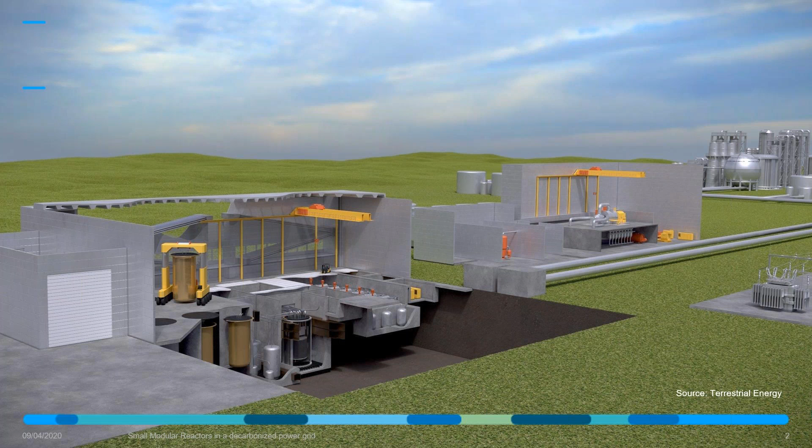So today and over the next 30 minutes, I will talk about small modular reactors, and I will try to answer one essential question, which is, can SMRs enable an affordable zero carbon transition for the European power grid? But before we dive into the economic study we performed, I want to share something that I truly got to believe over those last 2 years while I was working on the topic of SMR. And that is that I'm more and more convinced that small modular reactors may very well be the next big thing for the nuclear industry and even for the energy market as a whole.

Okay. You may wonder why I formulate such a strong statement. I would say that the reason why Tractebel does believe in SMRs and why we think small modular reactors are different is because it is a business model that starts from the right questions. And they do bring pretty sensible answers to those questions. So usually when I'm talking about this topic, I try to summarize those questions into 4 main questions.

The first one would be, in the post-Fukushima context, how do we recreate trust in nuclear safety? This is not an easy question to answer. For sure, there is a large variety of SMRs that include different technology, very different technology. But I would say the common thread within the SMR business model is the following. They aim at making safety simpler, which means simpler to explain and simpler to understand.

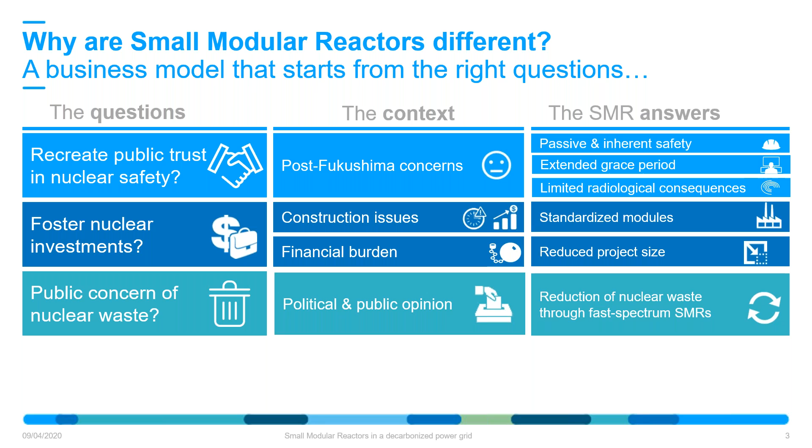I mean, anyone that has been working in nuclear energy right now probably has had a discussion with their families or friends about what is the impact of nuclear waste. Of course, there are technical solutions, valid technical solutions that have been put forward, but having the ability to reduce the radiotoxicity and to reduce the volume of nuclear waste, especially spent nuclear fuel, is definitely an advantage.

And then I would say the fourth question, and the one we will spend more time trying to understand today, is how SMR can play a role in the zero carbon transition. I will already give you very quick elements of what that entails. First of all, we know the context of intermittent renewables having a growing share of the production mix. That has its challenges. We know also the context of climate change that asks for a rapid decarbonization. SMRs try to tackle both those elements.

I would say for the first one, we know that nuclear energy is a decarbonized energy source, but SMR brings something new, which is flexibility. Flexibility understood as the flexibility to balance the intermittency of renewables. That's a cornerstone of the SMR business model.

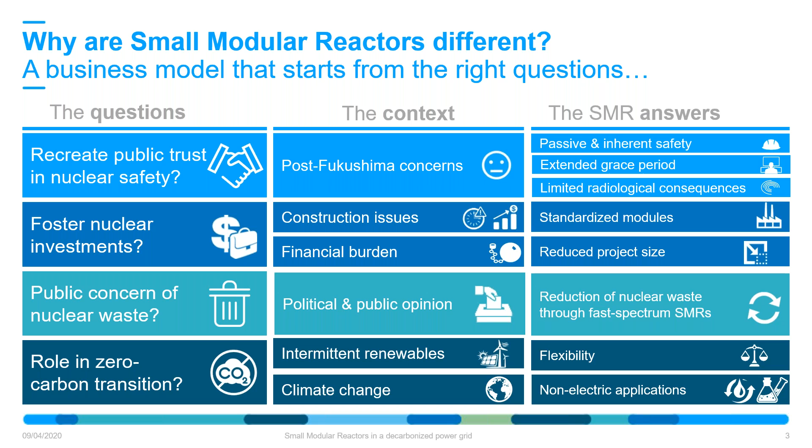And then I would say the second element that I won't be covering today is that some of the SMRs try to tackle the sector of heat production for process heat applications, industrial applications, that is harder to solve with only wind and solar energy. So really being able to drive a deep decarbonization process outside of the normal areas of nuclear, or at least of renewable energies. All right.

Last thing that I want to say within this introductory part is that we see SMR as a growing market. I should say that SMR is not a single product. In fact, over the last few years, we've seen growing interest in the development of small and advanced modular nuclear reactors, with more than 50 companies, both established companies and startups, developing their own products, and that's in more than 10 different countries.

So when I was saying it's not a single product, I really mean there is a variety of products, more than 50, that also cover a lot of different reactor types. There are more than 6 types of nuclear reactors on the SMR market. The light water reactors that we know and have operating mostly in the world today, but there are also some more advanced technologies, high temperature gas cooled reactors, liquid metal reactors, all kinds of technology that bring very promising features for the future.

And it is clear that the hype about the small reactors is real, but the question I want to focus on today is: is this hype backed by economic drivers? And so that's what we'll spend the next 20 minutes talking about.

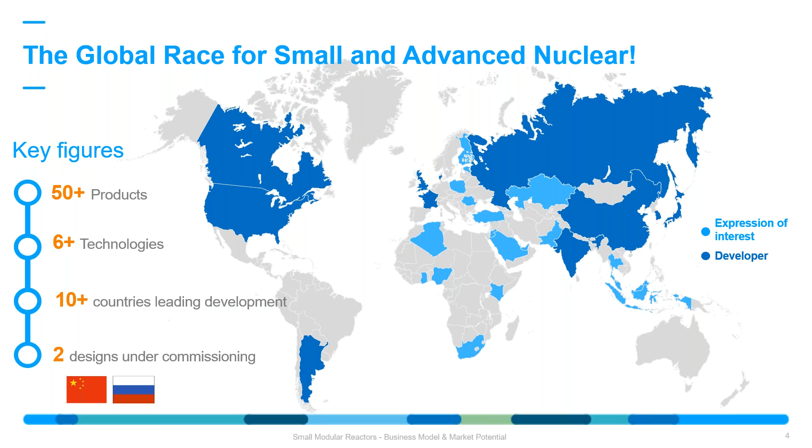So this brings us to an economic study that we've performed within Tractebel, also with the help of our colleagues of ENGIE Impact, who are specialized in economic modeling, and that I'm going to present today. The goal behind that study was to understand to which extent small modular reactors would make economic sense for the European energy transition between 2030 and 2050.

With 3 objectives set. The first one, understand the economic drivers behind SMRs. But we wanted to do that by going beyond the usual measurements that are used to compare energy sources, which is plant level cost comparison, usually done with the levelized cost of electricity, and really tackle grid level costs to try to understand some specificities that are brought by renewable energy systems.

And one of those specificities is that the more renewables you have in your system, the more you need battery or storage capacities, as well as a strong grid, to be able to balance the intermittency of renewables. And so we wanted to see beyond levelized cost of electricity what that would represent and how SMRs with their flexibility feature can help solve that.

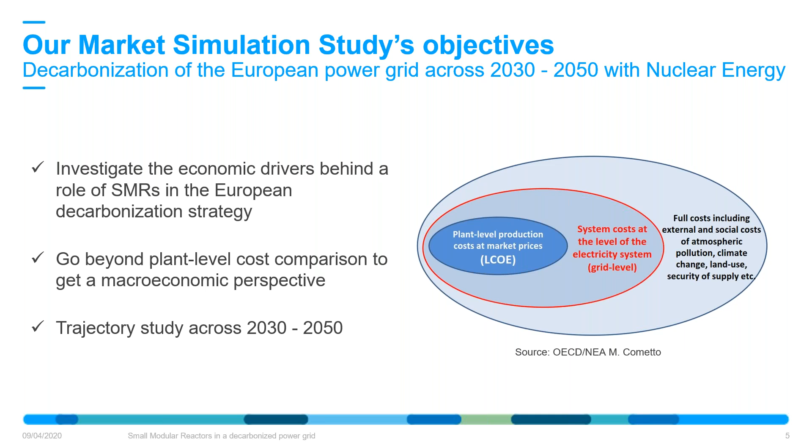So this brings me to the scope of the study, and let me start by explaining a bit about the methodology that we followed and how the market simulation study that we've performed works. I will try not to get lost in the details. I love that stuff, and sometimes I can really get into too many details, but I'll try to get to the basics.

I would say that basically the market simulation tool that we've used, which is called Plexos for those who might have heard of it, starts from today's energy mix and invests into new energy assets in each country, that are modeled to fulfill the demand of the European power grid. And this demand is also modeled based on some assumptions and studies that have been performed to try and measure the growing demand of electricity in Europe across the 2030-2050 period.

The tool that we use basically tries to solve an optimization problem that aims at both minimizing the total system costs of the whole European copper plate, while also fulfilling some constraints on achieving carbon emission reduction targets that are in line with the ambition of the European Commission.

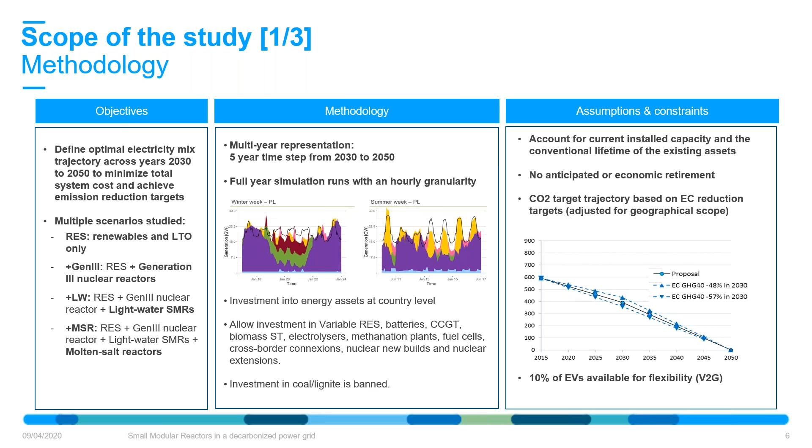With regard to the scope of the study, we've also included multiple scenarios. What is important to know is that we compare different scenarios to a base case scenario that came from an earlier study performed in ENGIE Impact, where the idea was to go to a zero carbon transition in 2050 with renewable energy systems only. So in that case, investments are only allowed in renewables, gas and biomass, and for nuclear, the only thing that is allowed is lifetime extensions that are already planned. So you don't have nuclear in that scenario.

And we compared that scenario with other scenarios where we gradually introduce investment into new nuclear assets according to their maturity. So in scenario 2, we allow investment into generation 3 reactors. In scenario 3, we allow investment into light water small modular reactors that should be ready and commercially deployable by the end of the decade, and maybe even mid-decade for some of the vendors.

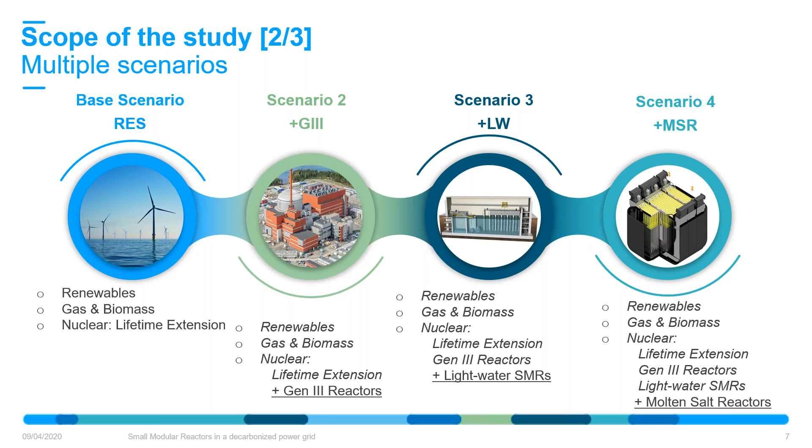Then Switzerland, which is also an established nuclear country, well interconnected within Europe, and that also has a lot of potential for hydro energy. So that gave us an idea of a different profile. And the last one we modeled was Poland, a country whose energy production is highly carbon intensive, and that is considering nuclear energy in the near future, with maybe a potential for renewables that may be a bit lower than in those two countries I mentioned before.

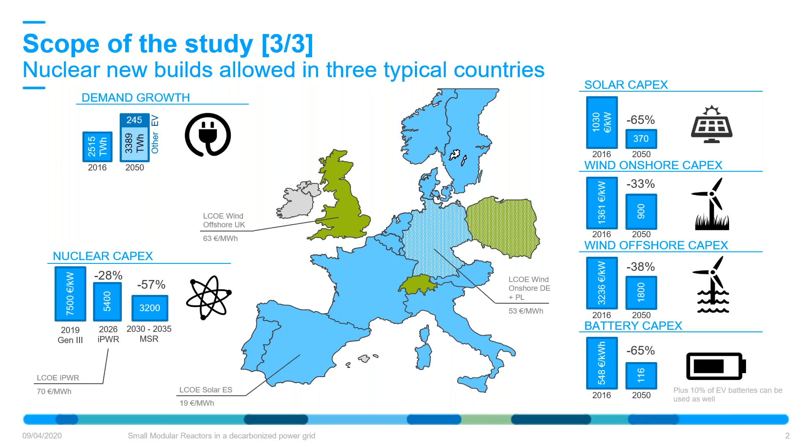So this now brings me to the results. First of all, small disclaimer, I want to say that the results that you see here are not a prediction of what we believe will be the future of the energy market in Europe. It's more a view of a macroeconomic optimum that would be achieved under some given assumptions that you've seen on the previous slides.

Nevertheless, what our study told us is that there are great economic prospects for small modular reactors. I would say that Gen 3 reactors at current cost estimation, that is about €7,500 per kilowatt electric, estimated based on the Hinkley Point C costs, are barely competitive in the 2050 picture, except in countries like Poland.

But even where we see that, we see also that for light water SMRs, the share of production that is reached in the economical optimum in 2050 is about 25%, a quarter of the total production at least. That's the case in the UK. In Poland, you see that it goes even to 65%. And that shows that really from an economic standpoint, SMRs do make sense in the energy mix.

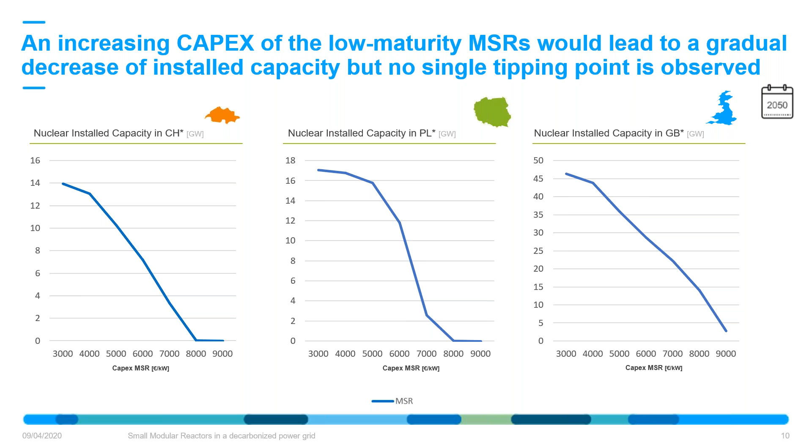But what is more important to notice about molten salt reactors is what we've seen in our sensitivity analysis: even if you double the capex of molten salt reactors, because they are low maturity technology and costs may increase in the future, even though we've already accounted for a margin on the costs advertised by the vendors, there is still an investment into major installed capacity for molten salt reactors. And that is due to one of their features that I will spend a couple of minutes talking about in the last part of the presentation, which is their very high flexibility.

So indeed, if you look at molten salt reactors, you see that they have very high load balancing capabilities. And this is due to the thermal or heat storage feature of those reactors. The idea is the following. Instead of changing the power from the reactor side, molten salt reactors have an intermediate loop that comes from concentrated solar power, with large heat tanks that are filled when they are not producing electricity and emptied when the turbine is producing electricity.

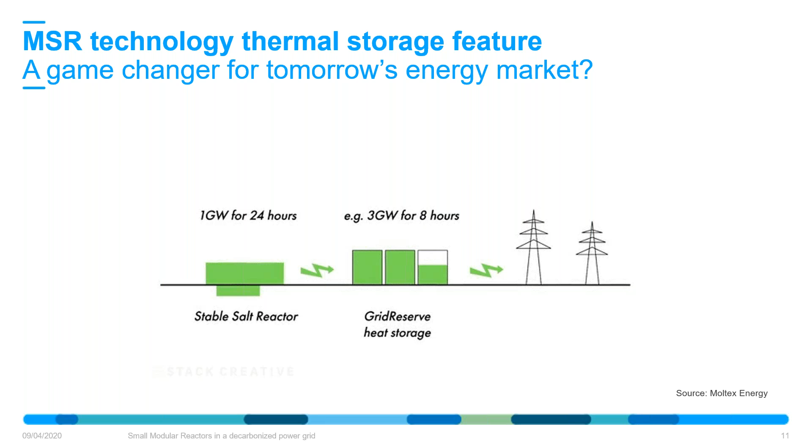I should say also that this feature of molten salt reactors is not new. For those of you who know a bit about concentrated solar power, you should be familiar with that concept. This technology directly comes from concentrated solar power, where we see that storing energy in the form of heat is very efficient because you lose very little power over time, and that has, of course, benefits compared to what you could do with batteries.

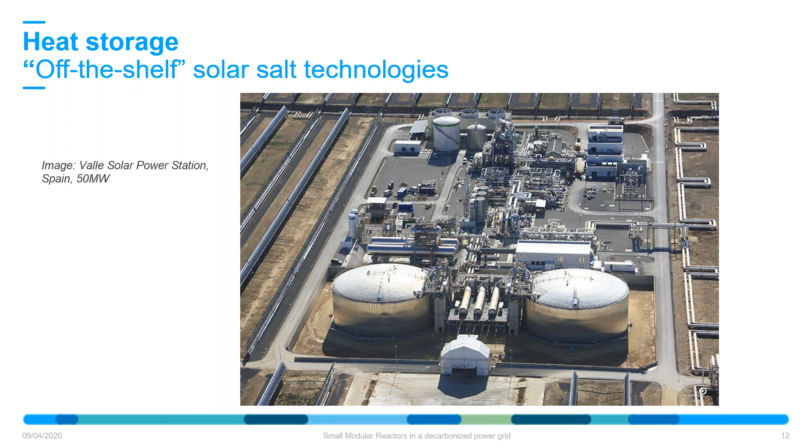So what does our study tell us? Well, if we look at the sensitivity analysis that we performed to try and optimize the storage and production size of molten salt reactors, we see that flexibility is clearly the key to complementarity with renewables. And this is specifically true in cases where renewables may reach a higher share of the production.

You might remember from the first slide of results that I showed that from an economic standpoint, we see at first a very high penetration of molten salt reactors into the grid. This might not be realistic, and so if we limit that potential to 15%, as we did in our study, as we can see on the slide, the optimal storage size increases as long as the renewable penetration increases.

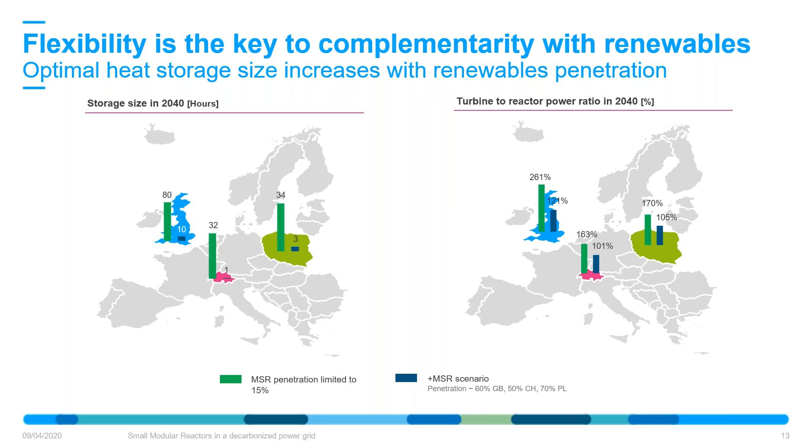And for a potential of molten salt reactors that is limited to 15% of the production share, we see that the optimal storage size is somewhere around 30 hours, whereas the turbine to reactor power ratio is about 1.6, 1.7, meaning that you would have, for a 1 gigawatt reactor, a 1.7 gigawatt turbine to produce electricity.

And I would say that this brings me to the most important conclusion of this study, which is that levelized cost of electricity is not the whole story. In fact, if you look at the levelized cost of electricity in the scenario I just showed, you would see that the capex linked to this thermal storage and to increased turbine size makes it not so competitive with renewables at first. This is also the case if you look at light water SMRs in the first case.